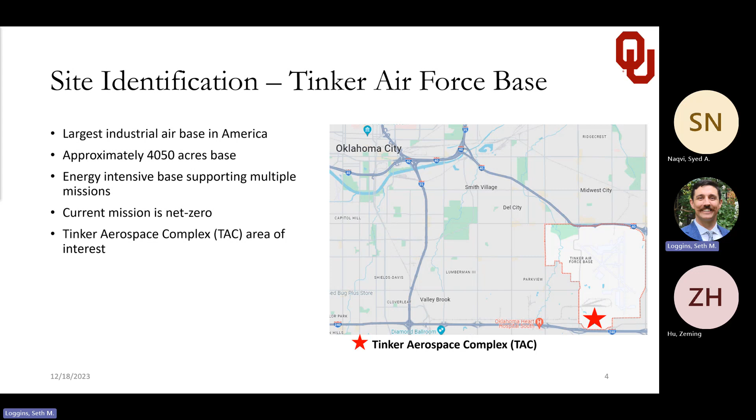Specifically, the Tinker Aerospace Complex, the TAC, which is shown here on the map at the bottom right. This facility was chosen as an area of interest. I'm showing the same facility here, kind of zoomed in from an aerial view. This is a 3 million square foot facility.

The facility is heated via a hydronic heating system. Overall, the facility requires roughly around 1.5 megawatts thermal during the winter months for heating processes. As mentioned earlier, natural gas is the primary use for Tinker, but specifically at this facility, their hydronic system utilizes natural gas-fired boilers for heated water throughout the facility.

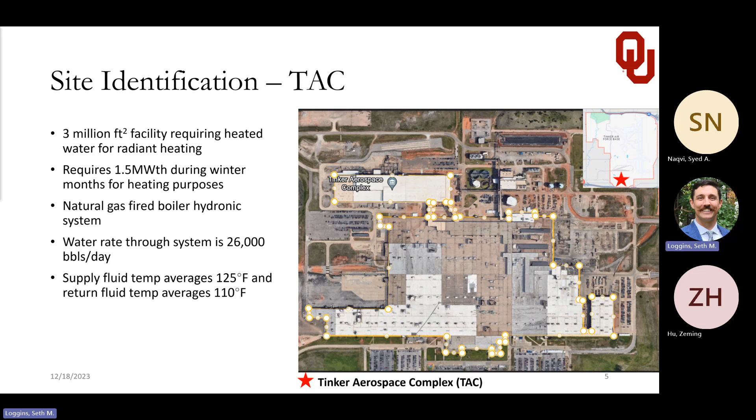The water rate for that facility is fairly significant. It requires about 26,000 barrels a day of fluid that goes through that system. In the winter months, the supply fluid temp that leaves the boilers and traverses through the building for heating is around 125 degrees F. That fluid, after heating the building, returns back into the boilers at an average temp of around 110 degrees Fahrenheit. So just some project details there.

This is another aerial view showing Tinker Aerospace. You can see the skyline of Oklahoma City in the background. It's a massive complex. The complex itself, as I mentioned, is 3 million square feet, but the opportunity that we saw as a team was a significant amount of legacy oil and gas assets within a 3 to 5 mile radius of Tinker Air Force Base.

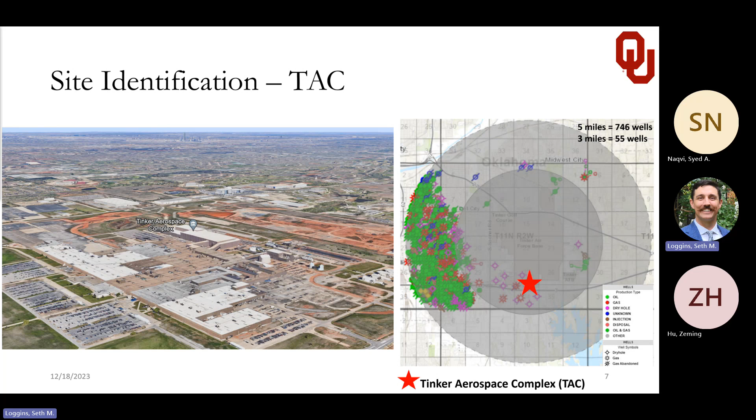The map here on the right-hand side still has the TAC annotated, which is our end user, our end facility that we're aiming for. But all these wells off to the left of where the TAC is located, you can see there's a significant amount of oil and gas infrastructure. A lot of the green is currently active, but there's a significant amount of abandoned or dry hole inactive wells in the area that provide easy access to the subsurface at a reduced or no cost, depending on negotiations with the operator. So we saw that as a significant advantage to explore.

Moreover, the heat in the area we saw as relatively hot for a direct use, especially considering the needed 125F range for Tinker's boiler system. The map shown on the left-hand side, you can see the Tinker Aerospace, the TAC, is still shown here.

This is a map provided by the Oklahoma Geological Survey showing temperature gradients of these specific well sets that were directly measured. You can see 25.9C is kind of in the area of what we're anticipating. So looking at this relative to our depth, we felt fairly confident that we could achieve that temperature.

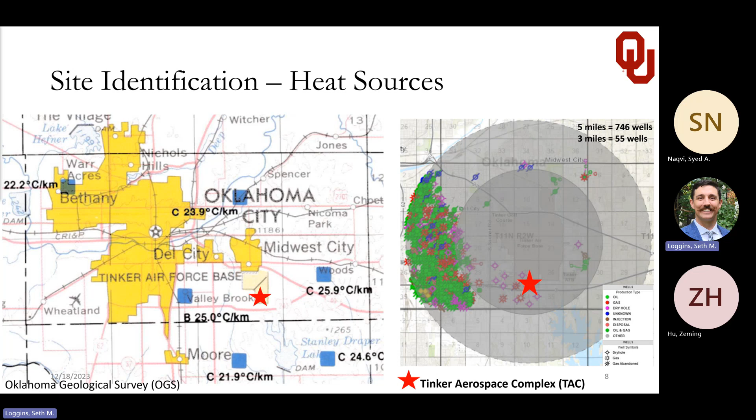The benefit here is these wells were the deepest wells in the immediate area. Knowing that we were chasing heat, we wanted to utilize existing oil and gas infrastructure to offset the cost, but we also wanted to be as deep as we possibly can to obtain the heat available. These proved to be optimal in that regard.

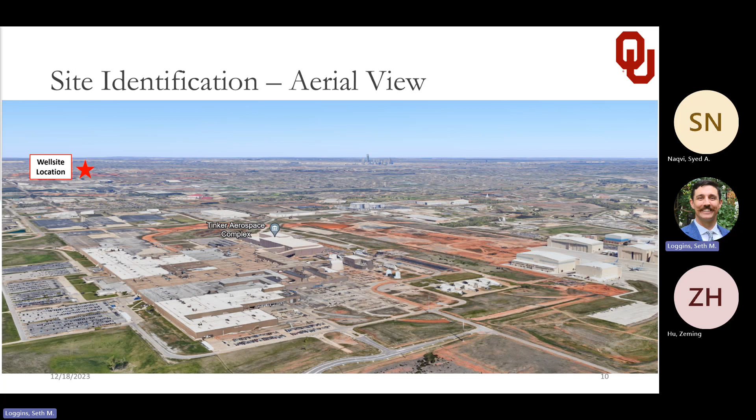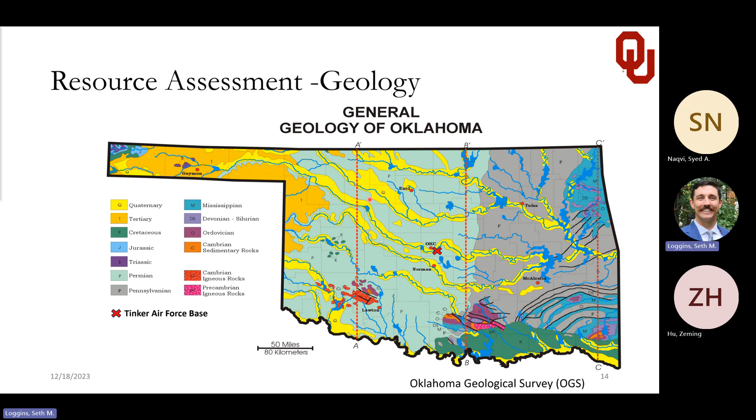Showing a cross section of a similar map here. The X's on each of these cross sections represent relatively where Tinker is located, and the cross section of interest here, the B to B prime, which is shown here in the upper left. The B prime's here cut off, but you can kind of see relatively where this is located versus the subsurface here.

Predominantly around that 10,000-foot-ish area, you get into the Precambrian age. It's overlain by the Ordovician and Cambrian sedimentary rocks predominantly. It should be noted there is a fault off to the southwest here that the team did take note of, but just to kind of give us a sense of where we are located within this resource.

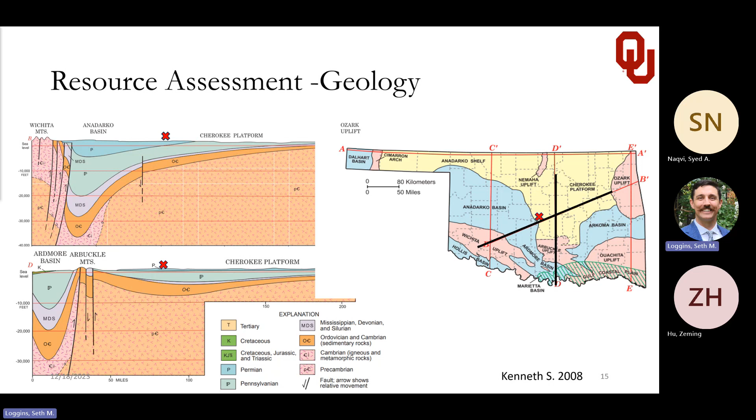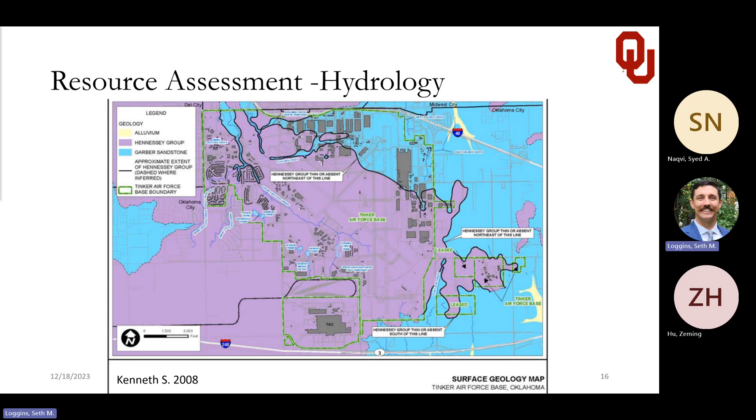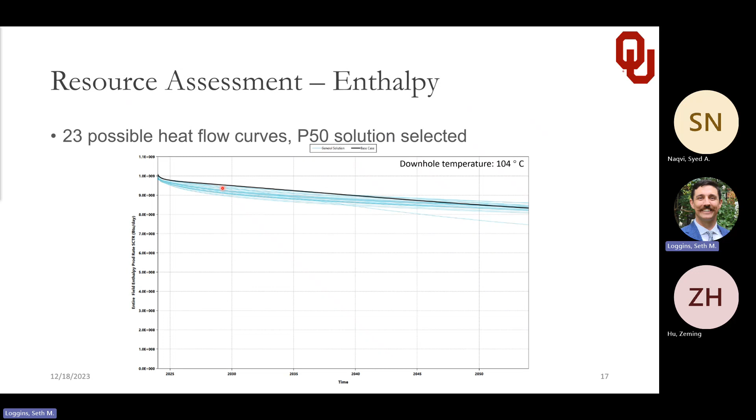Now, the black curve that you see here is a P50 curve that was generated based off of the aggregate of these general solutions. And this base curve is what we utilized as part of our project moving forward. So you can kind of think of this similar to type curve generation in oil and gas. Very same methodology being used here.

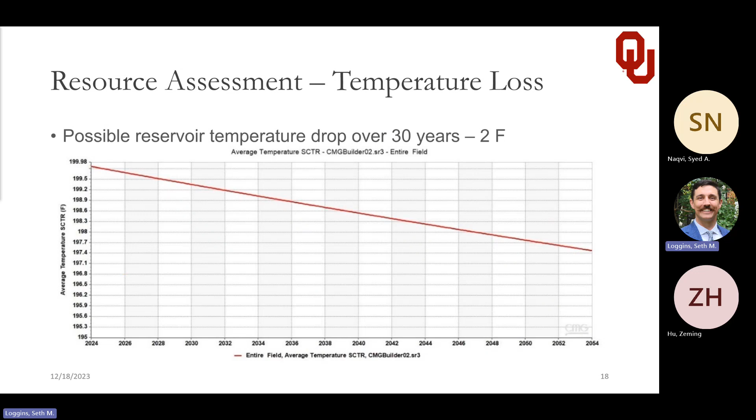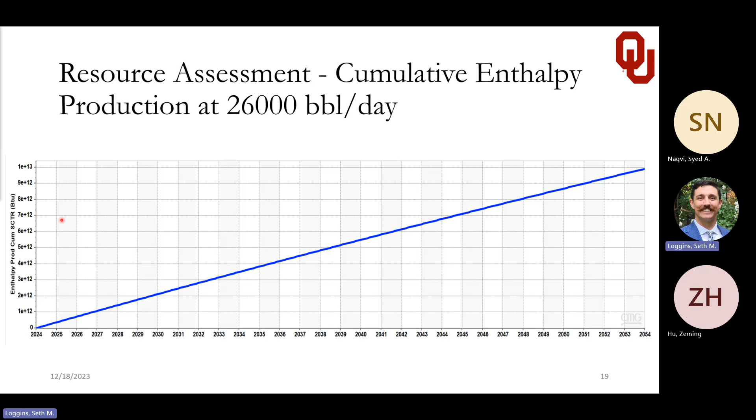Here it's a similar graph. We're just showing the overall cumulative enthalpy production. So I have BTUs on the y-axis here and the 30-year time scale on the x-axis, and you can see the cumulative generation of heat over that time period. This is assumed at 26,000 barrels a day, as were the previous graphs as well.

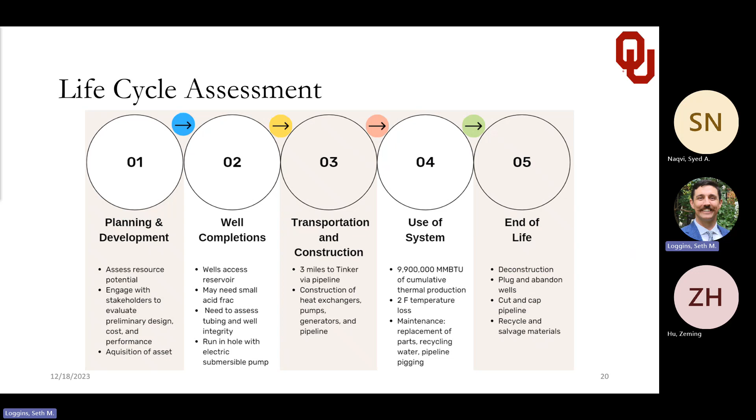So before we really get into the nuts and bolts, we wanted to come back to a clean slate and say, okay, what are we needing to design for? What is the specific need Tinker requires? And the graphs that I'm showing here were the data provided by Tinker Air Force Base, and on the upper right-hand side, I'm showing natural gas consumption. This is predominantly for the hydronic boiler system. I should note there's some residual natural gas use in the remaining facility at the TAC, but it's marginal. So it's safe to assume that all of it is consumed at the boilers.

Peak months are clearly January, February, November, December. Still pretty cold here in March in Oklahoma, but those are typically the majority of the months being used. If we look at the same data for the hydronic system energy profile, on the bottom right, I'm showing energy rate in megawatt thermals over the 12 months of the year. The blue bars here are the energy rate. In those same months, about 1.5, maybe a little heavier, megawatt thermals is the energy rate required for Tinker's heating purposes.

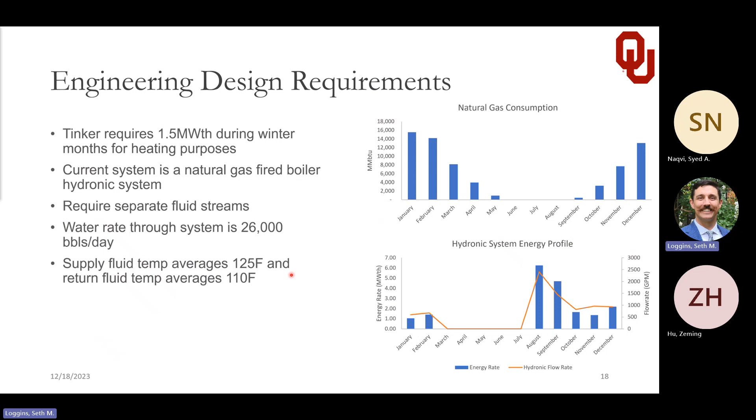So a high-level solution that we provided to Tinker Air Force Base, and we're going to dive into detail on this, is we mentioned those 3 assets, the 3 disposal wells. We were going to utilize one of them as a production well and 2 as injections, utilizing that existing wellbore infrastructure to access the subsurface. We were able to assess the temperature of the fluid based off direct measurements and from maps and identify around 194, 195-ish F at the surface after losses throughout the wellbore.

From the design criteria from Tinker, we were not able to utilize the same water system. Our brine would not be compatible with their hydronic system, which makes sense. Therefore, a heat exchanger would be required to transfer the energy between those fluids, and we would transport that fluid via a pipeline.

Moreover, we would manage our reservoir accordingly and re-inject the produced water back into the reservoir to maintain pressure. It would extend the life of the reservoir and maintain pressure of the reservoir. We would also have surface designs to prevent water disposal and contamination on surface.

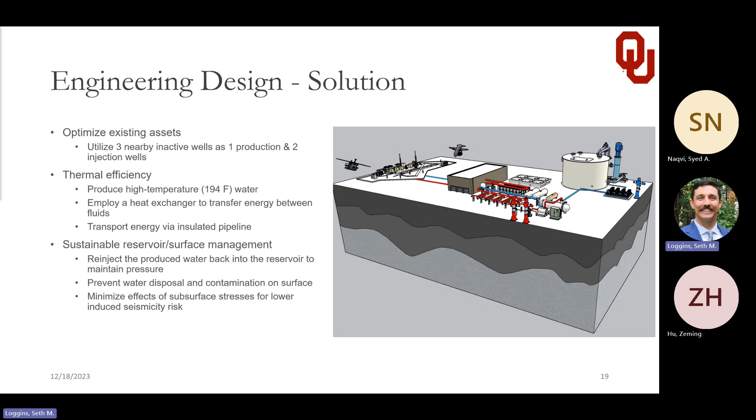The fluid from Tinker Air Force Base, as I mentioned, was on average around 110 F entering back into the system after it heated the building. So we used that temperature to run hydraulics and temperature loss calculations. That fluid would be pressured up and pumped via a pipeline to the plate heat exchanger 3 miles down the road.

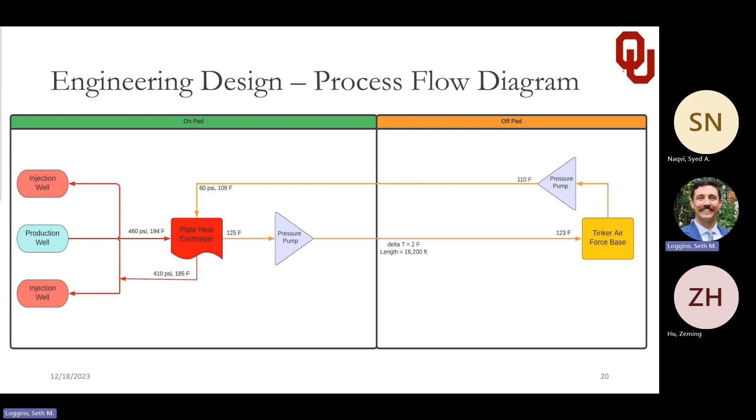What I'm showing here is the engineering well profile. In the table on the right, you can see the surface and production casing sizes. Typically these wells had 20-inch casing for surface, and the production casing is the smaller one at 12 3/8. That production casing was set at 8155. From there, all of these wells had an open hole lateral section, from 8155 out to 12,000 feet for this well, and a 10.5 inch hole was used to drill the open hole.

On the left-hand side is the typical wellbore profile for what we're proposing as the production well. You can see true vertical depth on the y-axis, horizontal displacement on the x-axis, and the corresponding diagram for each of those depths. You can see the production casing at 8155. We do have an ESP shown there at around 8,100 feet. And you can see the open hole from 8,155 to 12,000 feet.

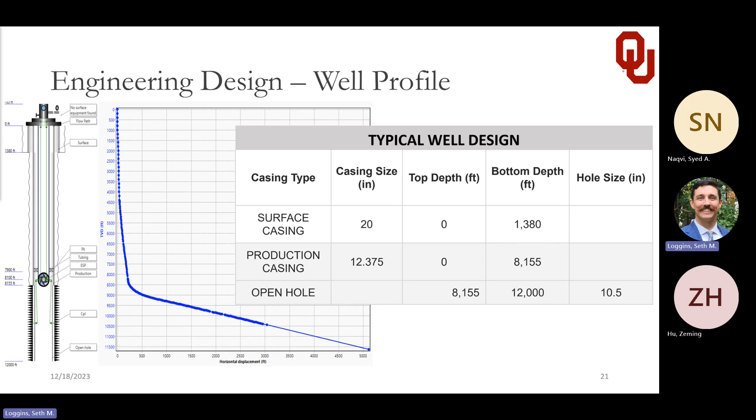We ran models for the production wells and the injection wells. Shown on the upper right-hand side in red is a depth versus temperature profile, showing the temperature in the reservoir and how it decreases up the wellbore. The same is shown in blue in the middle graph of depth versus pressure, how pressure traverses up the wellbore with the use of an ESP as artificial lift.

And on the very bottom in green is depth versus flow rate in barrels per day, showing 26,000 barrels. You may question what the significant jog is that you see in each graph at 8155. That's just the PVT crossover as you go from open hole into the casing.

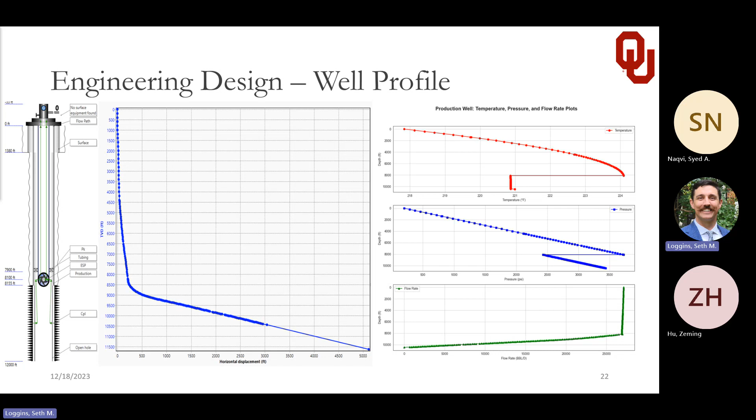Okay. So part of delivering this fluid to Tinker Air Force Base included the evaluation of a pipeline. Since we weren't able to be on site, as I mentioned earlier, there were some considerations with this project that made it challenging.

Alternative energies they've evaluated: wind, they can't have anything in the air; solar, they're limited on land use. And so that somewhat comes into play for geothermal as well. Not that they didn't have a footprint for geothermal, it's just it wasn't the immediate thought. It wasn't the immediate solution to have a well site on Tinker Air Force Base.

That being said, having nearby oil and gas infrastructure seemed advantageous to the group, but with that comes the need for transferring the energy via a pipeline. So the graph I'm showing shows the well site location of the 3 wells. It's an aerial view, as well as the pipeline starting here in red and how that pipeline traverses through Midwest City, OKC area and onto Tinker Air Force Base, where it would be terminated, basically the end use terminal point. The TAC is shown here in this yellow box.

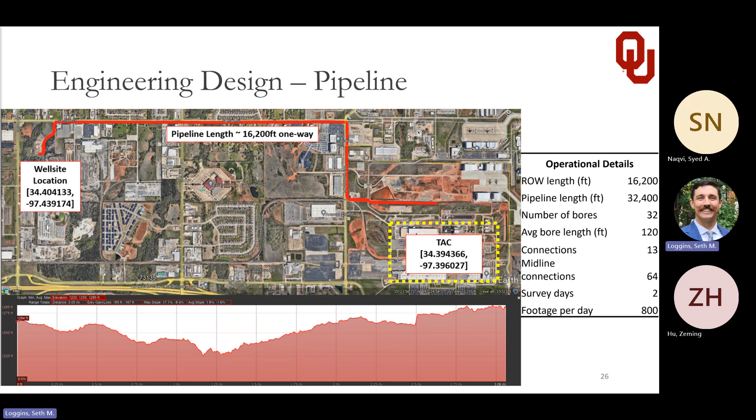So looking further into the hydraulic analysis for the pipeline, we wanted to ensure that the pipe we selected could get the rate that we needed, as well as the amount of head or pressure required from a pump. We don't want to be way oversized and need a significant amount of power and pressure to push this fluid. So what's shown here on the y-axis is pressure, distance is shown on the x-axis, and temperature is shown on the secondary y-axis on the right-hand side. And what I'm showing in blue, the blue dots, you can see the pressure required for 4-inch pipeline, and the pressure as it traverses across that distance.

Significant amount of pressure, 2250 is roughly the pressure required for 4-inch pipeline for 26,000 barrels a day. That temperature starting off at around 195, it loses through 4-inch. The velocities correspond to that, losing a little bit less there, about 160-ish degrees F.

In the same light, 6-inch pipe would require just about 400 pounds of pressure. Traversing that distance, you can see it gets to the end location at about 50 pounds of pressure. That temperature loses a little bit more, around 150 is what the temperature of the fluid would be at Tinker Air Force Base. So it would go from 195 to 150. If you remember, our delivery of this fluid needed to be at about 125. So that differential, that 45-degree loss, would not be sufficient. So within our design, we also incorporated insulation into the pipeline material.

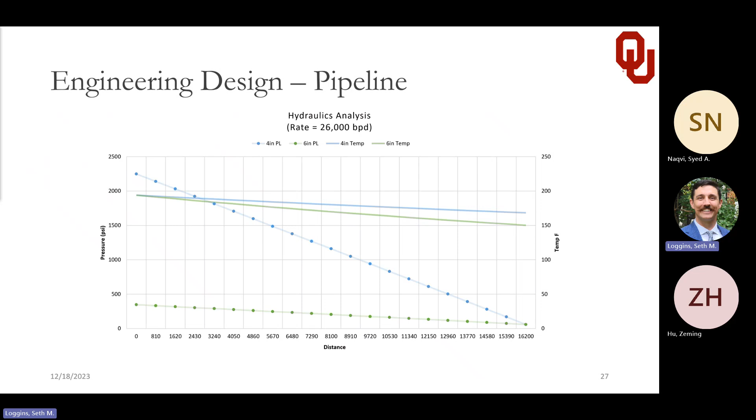So that's one thing that we were able to determine. So moving forward, we chose the 6-inch pipe. Specifically, we chose FlexSteel pipeline. This pipe is a composite pipe. It's shown here on the right-hand side.

It's basically an HDPE inner liner, which has all the corrosion and erosion resistant properties that you like from HDPE, because it is HDPE, but it is reinforced with steel, which gives it a significant pressure component. That's where its strength comes from. And then basically that steel is shielded by another HDPE layer. Corrosion resistant shield is what they call it, but it's basically just an outer jacket to protect the steel.

This is a pretty cool pipe. It's quickly deployable. It matches our temperature profile, and more importantly, it matches our pressure.

So the alternatives that we weighed were HDPE 4710, like a DR9 product, which is good at 250 psi, but if you're going to be at high temperature, about 180 F, that 250 psi needs to be derated from 250 to 180. So it didn't quite get us there in terms of pressure. If you remember, our 6-inch pipeline assessment is around 450, so that wouldn't do it for us.

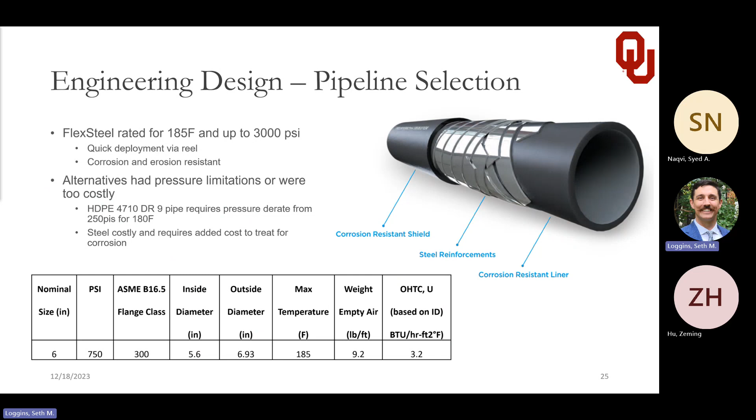The temperature loss through this pipe would be too great, so we would need the addition of an insulation material. So with the design in place, looking at cost, the capital expenditure required for the project was estimated at $2.6 million. This $2.6 million comes from the capital labor cost for the pipeline, as well as the material cost for the project itself. I'm not going to go through all these, but the labor cost for lay and test, which is just laying and testing your pipeline, is fairly significant.

The right of way here is also significant. This cost could go up. Right of way is always kind of a gambling game depending on where you're at. So this is a figure that we would like to keep our eye on.

For material, of course, closed loop material cost for 6-inch FlexSteel is $750,000. It's significant. All the fittings need to be stainless steel, so that's a cost that we incur. It's a significant cost. Pipe insulation had an impact. ESP, well completions, and pumps were all taken into consideration, and our heat exchanger was priced. So that gets us to the 2.6 million.

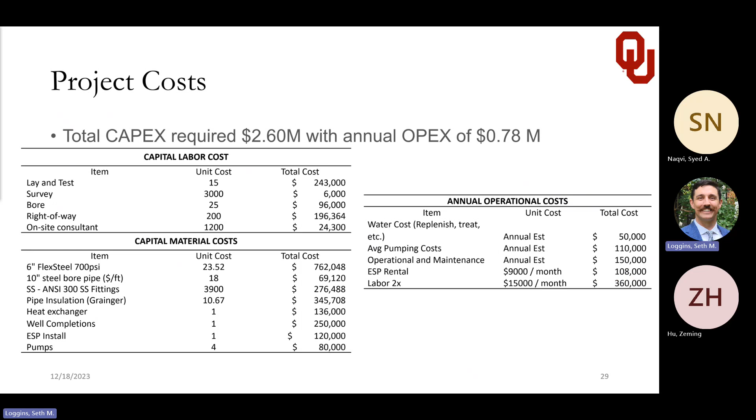And then for operational expenses, what we assumed here was a certain percentage of water that we would replenish and also treat. The average pumping costs for the year at 110,000. Operational and maintenance for the facility, our ESP rental, as well as 2 labor hands for the year, which get us to that $780,000 estimate for operational costs.

So utilizing the GEOPHIRES economic tool provided by NREL, we ran simulations for our direct heat project and looked at various rates on how our project looked and scaled versus the alternative, which is natural gas. Our final project shown here, based on the final cost that we just discussed, has a levelized cost of heat of around $2.70 per MMBTU.

You can also see here in this snapshot that the project does generate a significant amount of heat. From previous graphs shown, this is a fairly significant project with a large amount of heat generated. So 10 megawatts thermal is the average net heat production, with a levelized cost of heat, assuming full consumption, of $2.70 per MMBTU.

What I'm showing here in the background is how this project stacks up against natural gas pricing. So this is the Henry Hub natural gas spot price from the late 90s to current day. And you can see within the last decade or so, it's pretty break even. There are definitely some spots where the area under the curve might outweigh it.

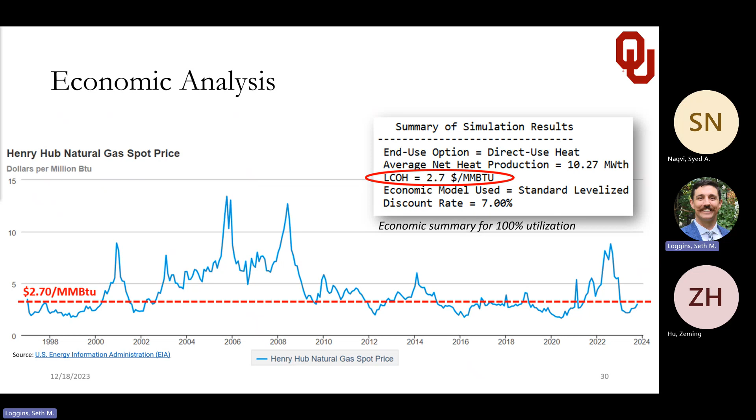It also should be noted that this $2.70 does correspond to 100% utilization. So this assumes that Tinker is using this for the full extent of the year, as well as that $2.70 corresponding to full consumption of the net produced energy.

As I mentioned before, the alternative to put a well on Tinker Air Force Base was not initially chosen, but once we had our final costs here, we did want to weigh those alternatives against our current project case. So this table is basically showing a comparison between three different alternatives. Basically, we have a project that says operate the current wells as is, and that's the project we just spent the last 30-40 minutes discussing, which is that $2.6 million capital investment required for the 3 wells.

The other alternative would be drilling 2 new wells on Tinker Air Force Base down to 6,000 meters of depth. So there's 2 wells, and I have it priced out at 2 different price points. Utilizing the Sandia National calculator for drilling efficiencies, the updated model, there's 2 different efficiency points: intermediate 2 and then ideal, ideal being the best case scenario for drilling. So this just gives you 2 different options for drilling efficiency for achieving this project case.

And you can see the overall cost here below. So $8.8 million for kind of the middle case. Your best case scenario, the ideal drilling efficiency scenario, drops to $7.5 million, or 7.4. The other alternative that we weighed was the benefit of having those wells having a large casing. We have the ability to plug back the current wells, those 3 wells that we looked at in our project, and drill deeper to find more heat.

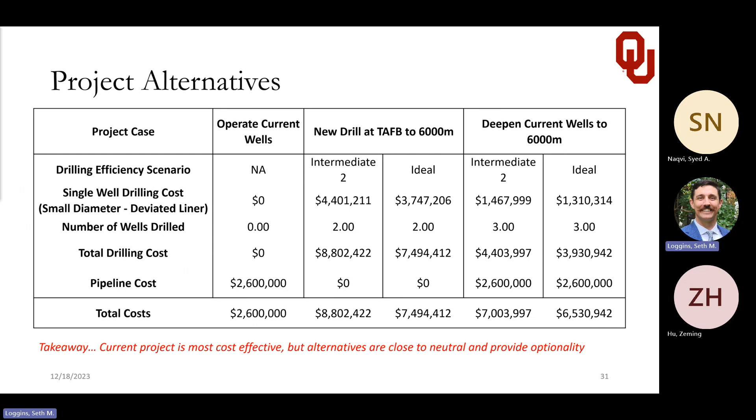So that's pretty much a wrap. We discussed this in the beginning. We looked at providing geothermal energy to Tinker Air Force Base, especially Tinker having such a massive impact here in the city and being a large energy consumer here in the city. We were able to identify 3 inactive disposal wells that we could utilize as quick access to the subsurface that had significant heat. We analyzed extracting that heat and getting it to Tinker Air Force Base and assessed that $2.6 million would be required for doing so.

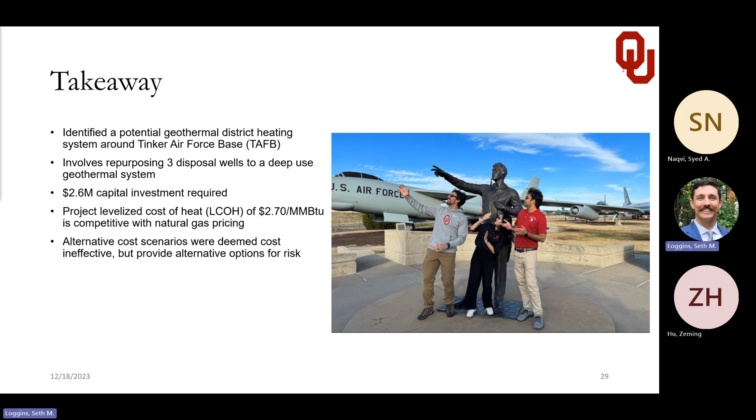Having that capital investment, the overall project, based on the amount of heat that it generates, has a levelized cost of heat of around $2.70, which we showed was competitive with natural gas pricing. We just talked about the alternative cost scenarios. Although they were cost ineffective, they provide different options based on different risk assessments. So overall, good project.